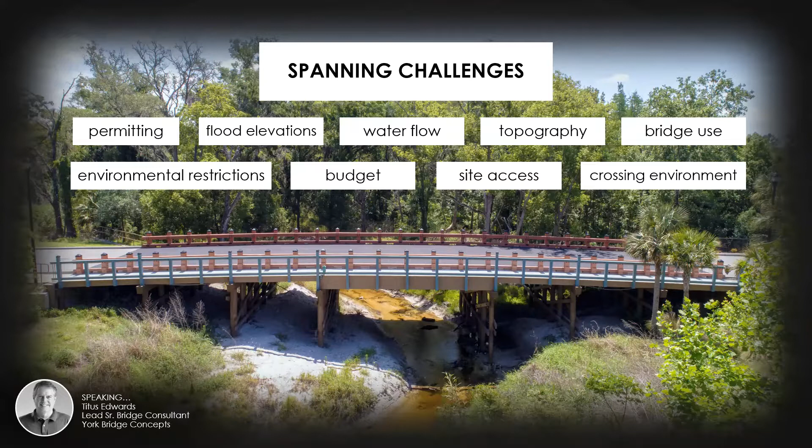Titus, I'll go ahead and pass the mic to you. Well, it's interesting, Cheyenne, that if you talk to developers, they will tell you that all the good land has already been built on. So whenever they're looking to develop, they're normally looking at land that has challenges. Now, when you're talking crossings and bridges, you're talking challenges, and there can be a multiplicity of them. There may be environmental restrictions, flood elevations, the flow of the water, the depth of the water. There may be a wetland involved, a floodway, a floodplain, stream boundaries, elevation changes, utility easements, and on they can go. And Cheyenne, even the budget of a client may sometimes be a challenge.

Absolutely, I would think budget restrictions would happen more often than not? You'd be surprised at how many times it becomes a challenge as well. But fear not, there are solutions, and that's what we're going to be talking about today.

York Bridge is a national design build timber bridge building company. In our 38 years, we've built over 8,000 bridges all over the country. Now, what that means is we have come across, with all of that experience, almost any imaginable type of crossing, and we're able to come up with a solution for the crossing.

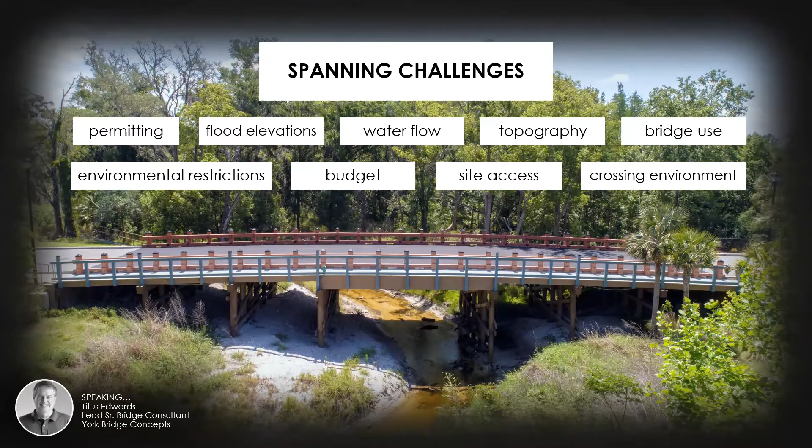In so doing, we've come up with about 5 basic spanning designs that we utilize, and that's going to be what we want to talk about in our outline today. We want to approach it from the standpoint of what the challenge was. We'll show you various pictures, how we overcame it, and why we use that type of design. Well, I'm super excited to dive in. Let's go ahead and get started.

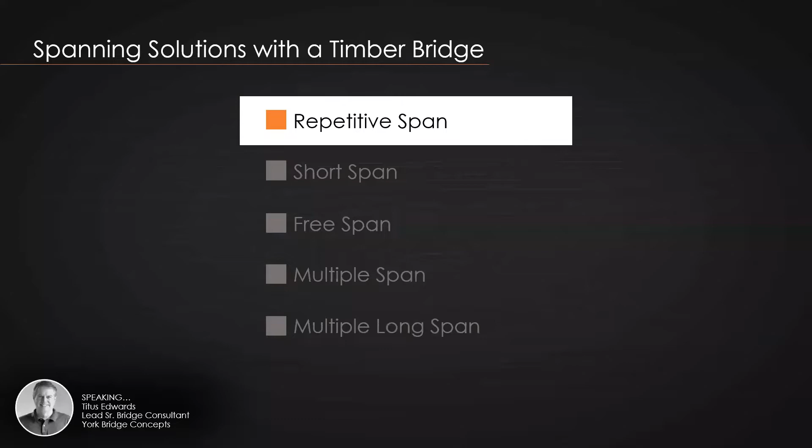The very first of the 5 spanning solutions we want to talk about is what we call a repetitive span design. What we mean by that, Cheyenne, is we're just simply taking short spans and repeating them through a crossing. Now, Titus, can I ask, what's the difference between a 10-foot and a 15-foot span? Why the difference?

It has to do, Cheyenne, with the efficiency of the size of the materials. I'm going to come back to that in just one second. There's another reason too, we'll come back to in just a moment as well.

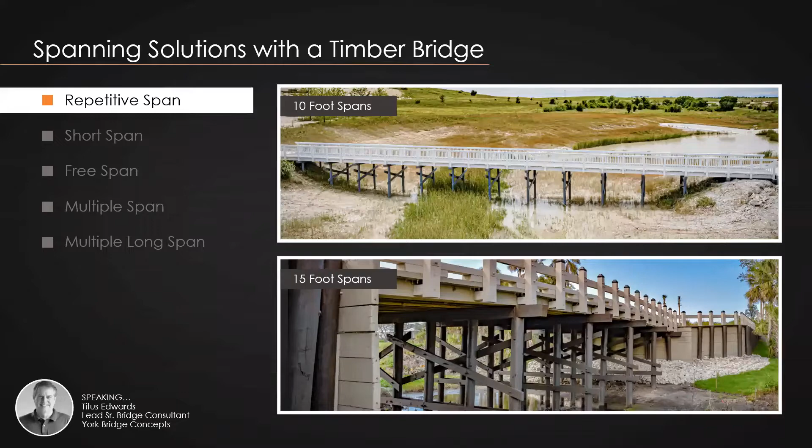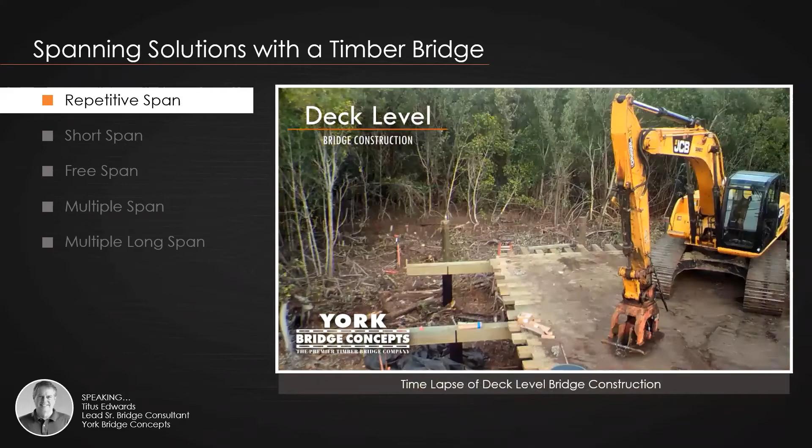But Cheyenne, there's another reason. What's that, Titus? It has to do with the reach of our equipment. We have a time-lapse video coming up showing us building a vehicular bridge down in Southwest Florida. This is a Sunset Beach bridge. Notice how we're building it. We're using an excavator, and on the end of it is a compactor hammer. We reach out, drive our piling, and we can reach out about 15 to 16 feet, drive our piling, and then build a section and drive the equipment on it. Deck level construction - we're known for that.

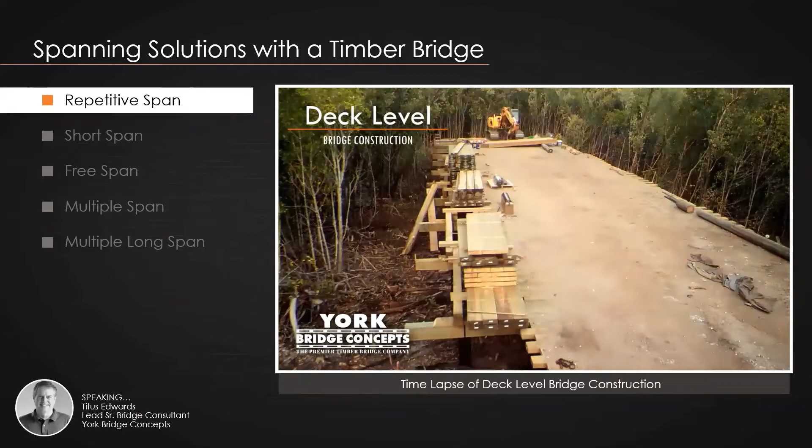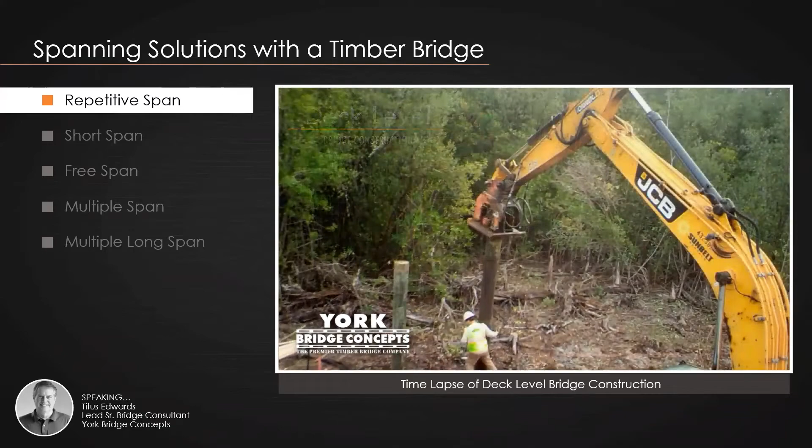We can build a pedestrian bridge that way with a smaller excavator - we can reach out 10 feet. With a vehicular bridge, we can reach out about 15 feet. That's the sweet spot, because it allows us this deck level construction, and now you can access over water without any dewatering or using mats or barges. It's a very efficient way to build, and the size of the material we're using works very well as well.

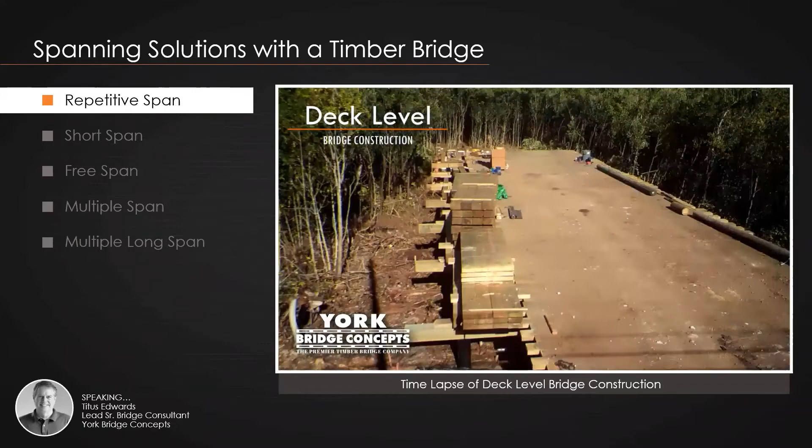Very cool. You know, one thing I love about time lapses is it almost seems like this job was done within minutes, and I'm sure the builders would definitely tell you otherwise. It took them a little bit longer than 3 minutes to build it, but we do build very, very quickly as well.

And we have some other examples of these repetitive span designs. This is the Delight Quarry Bridge in Reisterstown, in the Baltimore, Maryland area. What's going on here is a Beazer Homes residential subdivision. They were developing part of it to the left; there was another section of land to the right, but they had to get over a stream and a wetland. The way the civil engineer laid the roads out, they needed to come across, and we built this repetitive span design bridge to accomplish that. Absolutely beautiful bridge for sure, with a nice horizontal radius - it worked out very, very well.

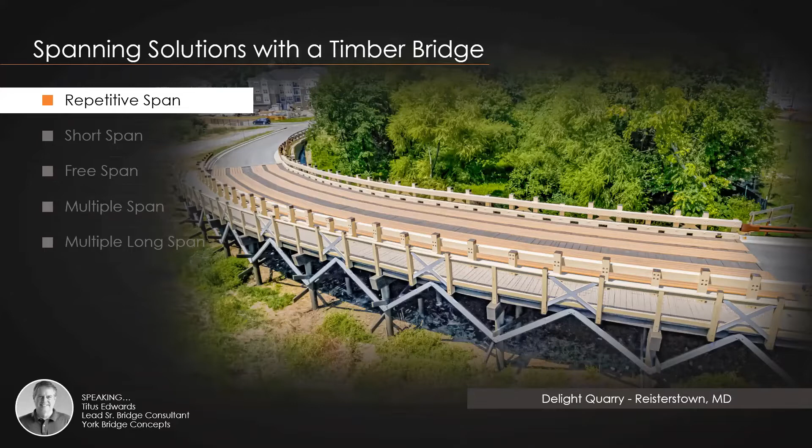Another project we did is down in Southwest Florida - this is the Ave Maria University. Isn't that a beautiful bridge? Oh yes, it is. Can you tell us about the challenge with this one? You can see it's a repetitive span design, and it's crossing over a lake. You had a university here existing, but on the other side of the lake they had property, and they wanted to build a shrine and have it be a gathering place for the students without them having to go all the way around the road. So we built, from the deck of the bridge, this pedestrian repetitive span bridge over the lake with piling bents 10-foot on center. It now allowed them that access so the students could gather over there.

I definitely love this one. I'm gonna take a leap and say the challenge here for this apartment complex would be making sure all the tenants were not swimming with the alligators to go swimming to the pool.

This is down in Florida, not far from our office, at the Iris at Northpointe. It is an apartment complex.

You can see, as all developments here in Florida have retention ponds, and the pool on the right. They wanted people to be able to walk over and get to the pool easily, so we built a repetitive span pedestrian bridge.

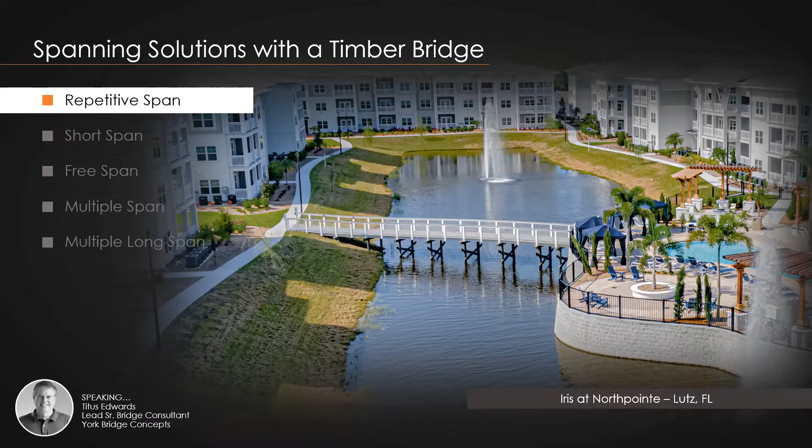Yes, you definitely don't want to be swimming across, getting involved with the alligators. Most all of our waterways have alligators in them. That's definitely one thing in Florida, you try to stay away from any body of water.

So these repetitive span designs are the most efficient, most cost-effective way to design and build a bridge over a lake, a pond, a wetland, or a waterway. But the key is where they will allow piling supports in the crossing, and that allows us to build from the deck and access places that may be difficult otherwise.

Well, thank you so much for talking to us about repetitive span. Can you go into detail about short span? Obviously, being shorter, what would be the benefit of going with the short span design?

Short span design is the second type of span we want to talk about, and that's where you have a small crossing, but you don't want to put a bunch of piling through the crossing. So you're doing one short free span design bridge. Sometimes it's either not logical or not permitted to put supports in a crossing.

The top is a pedestrian bridge, the bottom is a vehicular bridge. This is a 26-foot span you see here in the Orlando area, and you can see what we're crossing here.

By the way, Cheyenne, have you ever been to a pool complex and floated down the lazy river? Yes, I have. And the one thing I like is you don't have to pay attention to anything. I could just imagine you with your wide brim cap on, looking very nice.

This is a 26-foot free span, a very short span, and it worked very, very well. Obviously, you're not going to put any supports in the middle of that lazy river.

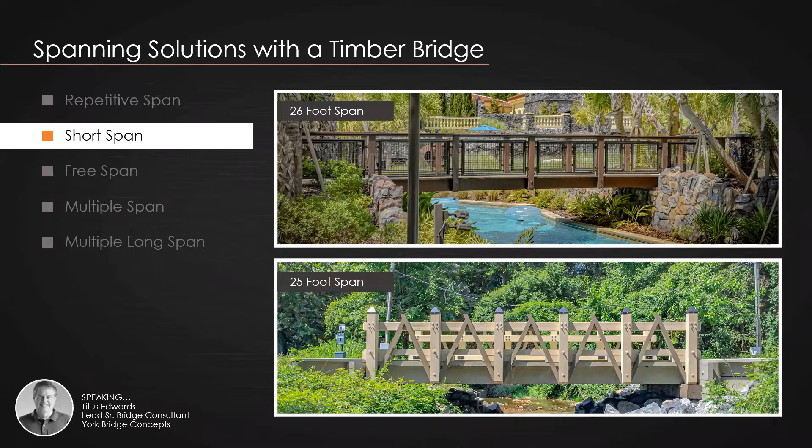It does. And this is also a very cost-effective design to build because we're able to utilize up to 26 feet, normally in the 25 to 26 foot range, sawn dimensional lumber for the stringers, and that's very cost effective.

Here's an example of these stringers that we're talking about to make the span. I believe this is the same one, the park school we just saw a picture of. Very cost efficient with these free spans up to 26 feet.

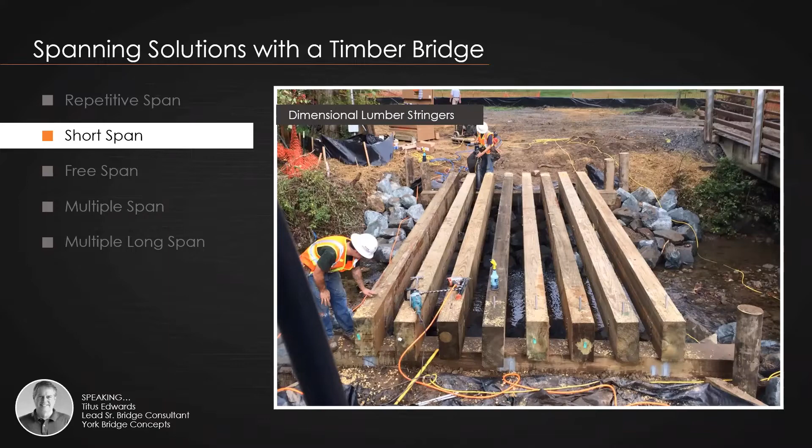Now, once we go over that, we'll talk about what we have to do in just a minute. Another bridge we built like that is up in North Carolina. This is our Meadowlands Bridge in Calabash, North Carolina.

Beautiful. Can you tell us about the challenge with this one in Meadowlands? This is a residential subdivision. You can see there at the bottom, very brief, very slightly, there's a creek there.

The developer had built out. He had one last section of land, but it was on the other side of a creek. He had to get over the creek, build a road to get access and let people live over there. He didn't really want to use a culvert; he wanted something a little bit more aesthetic.

So we designed and built this 26-foot long, one single short span, timber, two-lane vehicular bridge. It worked well for the crossing, and also worked well for the budget and the aesthetic intent the developer was looking for. So just another happy client.

We love happy clients indeed. Yes, we do. And our last example along this line is Dove Landing, a Beazer Homes residential subdivision up in Millville, Delaware.

Beautiful. So the challenge for this, I'm guessing we didn't want to go with a culvert alternative. So the short span was the one that was best for this circumstance, correct?

Correct. And they actually looked at a culvert initially. They wanted something, again, more aesthetic, that fit the crossing a little better.

What would be the benefit of free span bridges? The short spans we talked about go up to 26 feet because of the sawn dimensional lumber stringers. But what happens if you have a longer crossing that needs a single span? Well, we do what we simply call a free span using glue laminated beams. The difference is number one, the length, and number two, the beam. Instead of sawn dimensional lumber, we're switching to a glue laminated beam. These beams allow us to span further, 40, 50, 60, 70, even up to 100 feet, one single span without any supports in the crossing. They work very well for a number of reasons, and we'll talk about those in just a minute.

This bridge, by the way, Cheyenne, is up in New Hampshire. Wow, beautiful. I love it, looks like it was almost taken in late summer, early fall. You see those leaves changing. Beautiful.

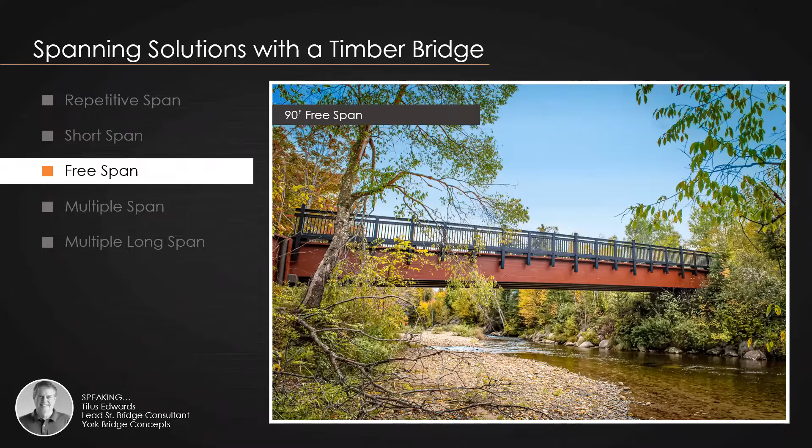Yes, Bretton Woods, New Hampshire. This is behind the Mount Washington Resort Hotel. It's a 90-foot free span, 10-ton bridge. There's a beautiful sensitive stream, and they weren't going to allow any supports in that stream. So we were able to do one single free span, and it made the crossing work very well.

Now, can you talk to us about the glue laminated beams, how it's different than sawn dimensional lumber? How are we able to get that sort of camber on that bridge right there? How are we able to do that effectively with the glue laminated beams?

You know, it's a good point that you make, Cheyenne. Sawn dimensional lumber, since it's cut out of a tree, is straight. So you cannot have a horizontal or vertical radius, you can't have a curve or an arch. But glue lams are man-made beams, and most all of them have a camber to them. You can see an extreme example to the right, but even the one on the left, by camber we're talking about a slight arch to them, which is part of the structure of the glue laminated beam, but also gives a nice side profile to the bridge.

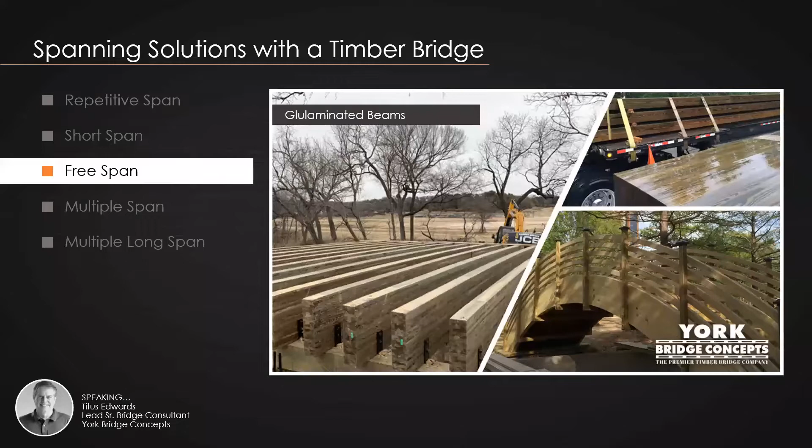Well, it's definitely really interesting, the difference of those. And I believe we have a time lapse of the glue laminated stringers getting set.

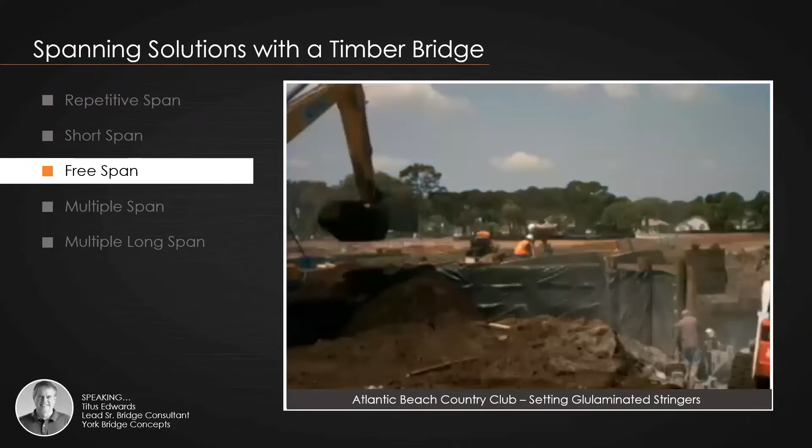Here we go. We built our timber abutments, and on top of those abutments we added the glue laminated stringers, and here you see us setting those. Now you're going to see in just a moment the completed bridge, same one. Ta-da! There it is.

It's the Atlantic Beach Country Club in the Jacksonville, Florida area. This is a 55-foot long free span bridge, and you can see on the side we use the glue laminated beams on our timber abutments, a 2-lane vehicular bridge for this golf course residential community.

Now it's interesting what was going on here, Cheyenne. This waterway may look very innocuous, but it was considered a wetland and a stream, and they were not allowed, because of the sensitive nature of it, to touch it. So they had to span over it, but they needed access to build a new clubhouse. This bridge allowed them to tie the road in and connect the new residences to the clubhouse.

Well, I think I've said all the past ones have been my favorite. I think this is my new favorite, just because it's beautiful. I love how it captures the color of that clubhouse in the background. Yes, indeed, it worked out very nice.

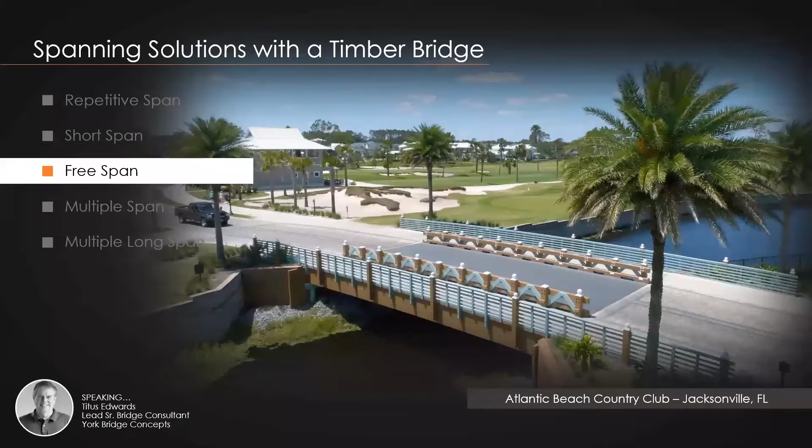Well, where might we use some of these free span designs? We'll show you some real quick. The one on the top left, you're crossing a very sensitive stream. This is Keystone College up in Pennsylvania, an existing school on the other side of the river. They had land and wanted to build ball fields, and this vehicular bridge allowed them that access.

The one on the right is Mount Washington Resort Hotel again in New Hampshire. This is the entrance bridge, an 80-foot free span, very sensitive stream with a lot of velocity. Because of the velocity, you wouldn't want to put a lot of supports in the water.

The one at the bottom is kind of hard to see what's going on, with what looks like a massive thing of trees down there. This is in California, which has a lot of environmental restrictions. This is actually a very deep gorge or ravine that was all environmentally protected, so they were not allowed to put culverts in or supports down in there. So we did one single free span, 77 feet long.

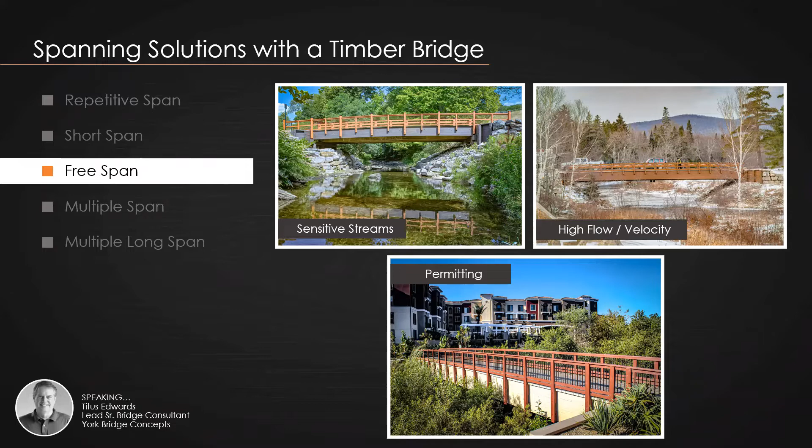And this is an apartment complex. Again, you're connecting different sections of the apartment complex to allow people to walk back and forth.

Now, can you tell us about the challenge with this bridge in Waynesboro, Virginia? This was a trail project, and they were building this trail right alongside the river, a beautiful place to walk and bike. But they had a little creek inlet that came across, dumping into the river, and the trail crossed it. So to continue the trail, they needed a bridge. In this case, they didn't want to put any supports in the crossing, so we did one single 40-foot long free span with glue laminated beams.

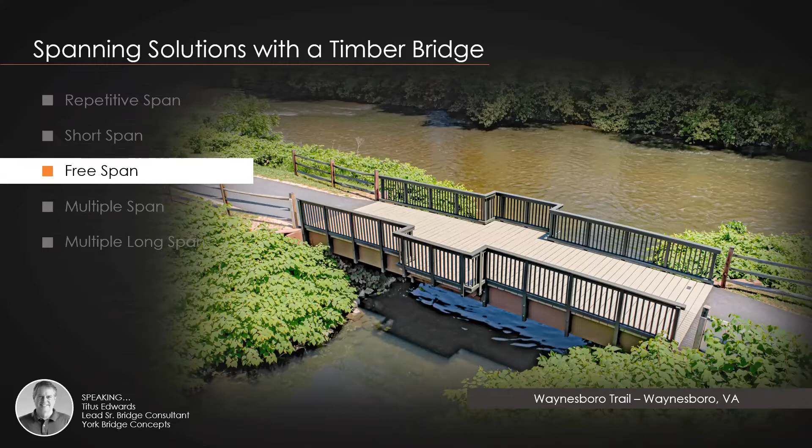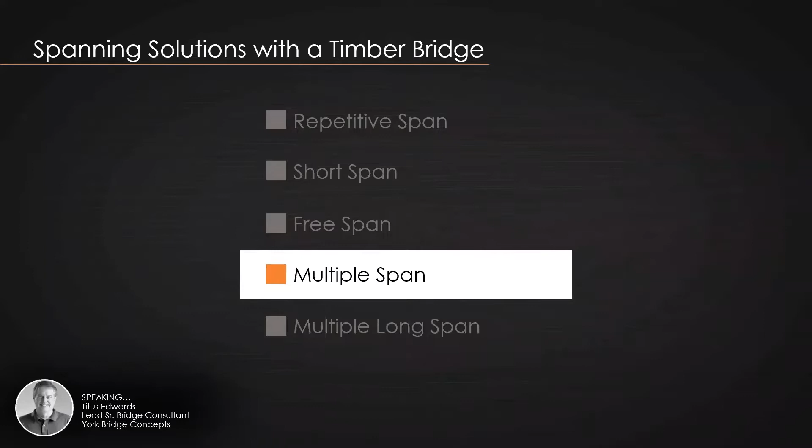Which leads us to our multiple span. Can you dive into a little bit about the multiple span versus free span, and the short and repetitive? Now we're really getting creative, Cheyenne. You're going to see this with the next two, which are variations of one another. By a multiple span bridge, all we simply mean is a hybrid of the first three designs, where you have repetitive span approaches and a free span section.

Now, here's a couple of drawings. The top's pedestrian, the bottom's vehicular. You're going to see both of these bridges actually completed in just a minute. But look what you have going on at the top. There in the middle, there is a 44-foot long free span with a glulam beam. But then notice, look left, look right. You see the piles, the short repetitive span approaches. That's what we mean: a single bridge, but it's made up of spans of different lengths.

The one at the bottom, same thing. Now it looks like on the bottom, there was an existing creek along with an existing utility easement. Was that one of the challenges we had to figure out how to implement this bridge? Exactly. We're going to see more about this in just a moment, but there was a stream in the middle, and there's also a utility easement, meaning a utility pipe was buried in the ground. So the bridge is 250 feet long, and we put an 80-foot free span in the middle over the creek and easement, and then added our short repetitive span approaches.

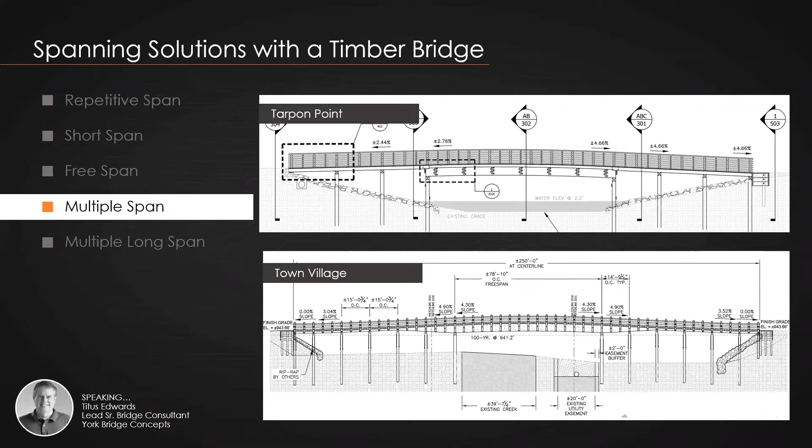This is very creative, but it's a very effective and cost-efficient way for these longer type of crossings. I believe we have an example of the town. There it is, Town Village. That's what we were talking about.

This is actually in Kennesaw, Georgia, north of Atlanta, at the town center at Cobb. It's a mall. By the way, Cheyenne, have you ever been to a mall? You know, I feel like if I were to say no, my wallet would stare at me and laugh. So yes. All women love malls, right?

Well, there is a big mall right there to the left, but to the right, the developer had some land and he wanted to connect so he could build some apartments and other commercial and residential areas. But he had a problem: there's a stream there. And right next to the stream we saw in the drawing, there's a sewer line and the sewer easement.

And this is all considered a floodplain, but we resolved his problem by a multiple span design. You see the short span approaches, the 80-foot glue lam span over the sewer, over the creek, and then the pile supported on the other side. So multiple span design worked very, very well and very cost efficient for the client.

You can definitely see the creative aspect that went into that design for sure. The one on the bottom, I love these covered bridges, Cheyenne. Yes, beautiful. This is Winyah Bay, another residential subdivision in Georgetown, South Carolina.

This is the entrance road going in to allow people to get there, build houses to the subdivision, but they had a problem. And that was what looks to be a little pond is actually considered a wetland area. And they were limited in how much impact the Army Corps of Engineers would allow into that wetland.

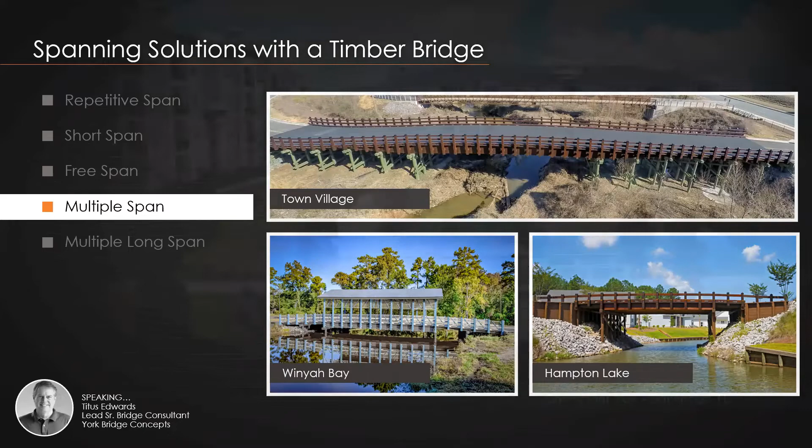And Esplanade Lake Club, love this, one of my favorite bridges. Residential subdivision off to the left. This is the entrance road coming in. So they had to get over this canal and connect the lakes, allow boat traffic. So we spanned over that section and added two small approach spans. And again, it met the design intent that they were looking for and kept it well within their budget. And again, what a beautiful looking bridge.

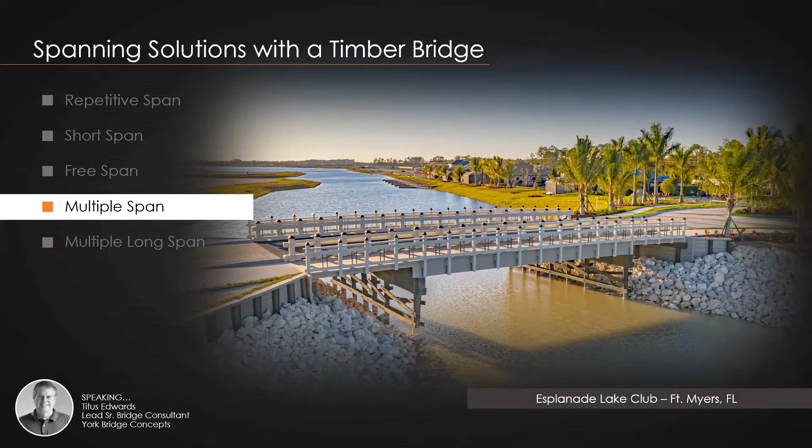Absolutely beautiful. Yes. And one final one. This is the drawing we saw to begin with, the Tarpon Point. There to the left is the Westin Hotel, and they built a convention center. To the right is a new parking lot. So they wanted to get people from the parking lot to the convention center. A bridge was needed across this waterway.

Now, you can't really see what's going on here, Cheyenne, but this was a very sensitive environmental area. Plus the soils were really, really bad. They're like butter. You drive piling more than 100 feet to be able to find any bottom. So we wanted to limit the number of piling bents. So we did a multiple span design. You've got the 44-foot free span over the main water channel with the short free span or repetitive span approaches left and right. Turned out very nice.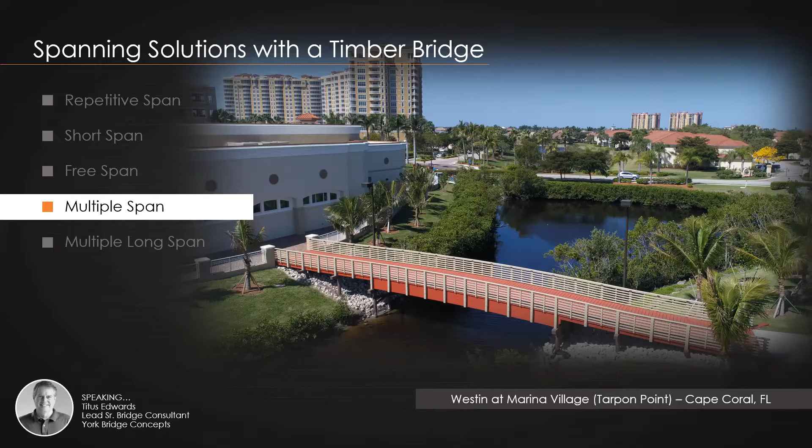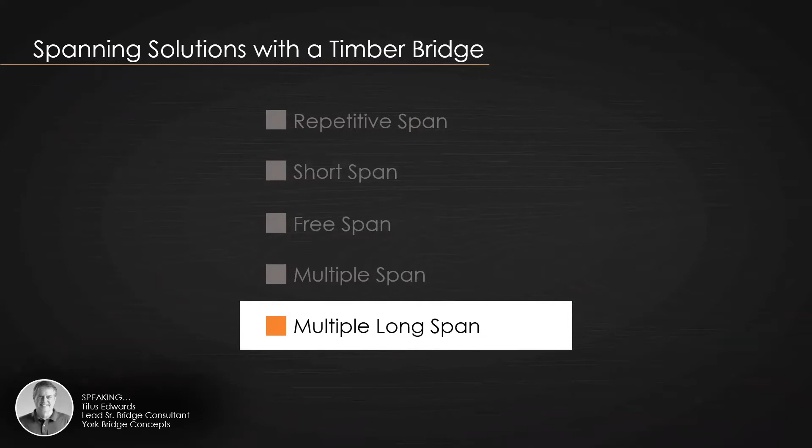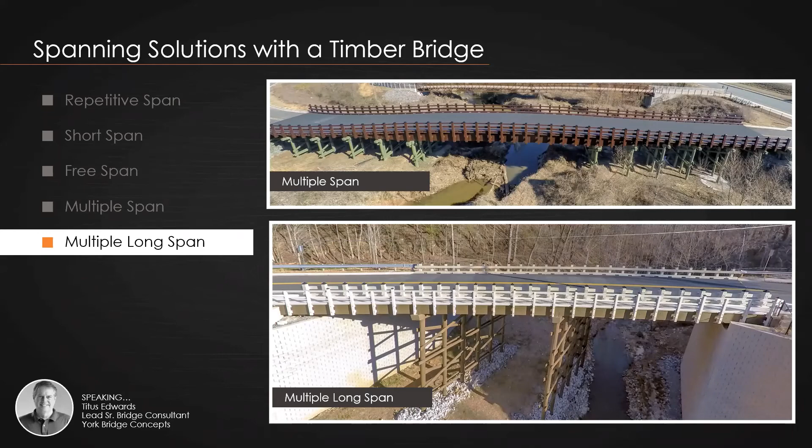Multiple long span design—again, very creative and used in a number of cases. We're going to show you this one on the bottom and talk about it because it's a perfect example of where and why we might use something like that. It looks like there's a sort of tilt or arch to the support. Is that correct?

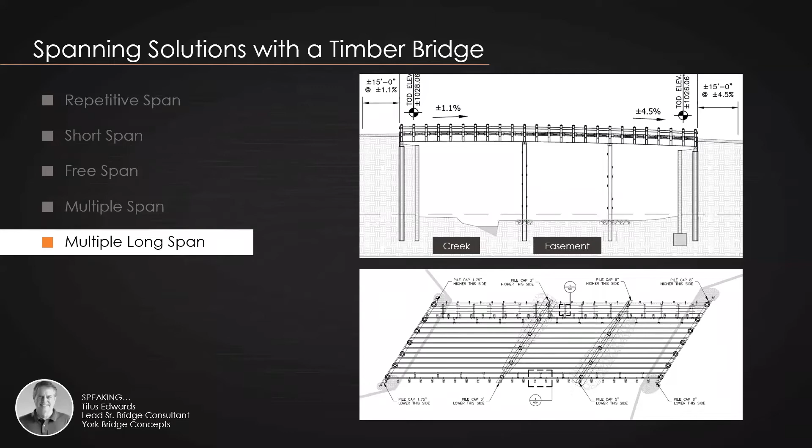That's correct. At the bottom, you can see the piling bents—the bridge is skewed or angled to the road. We'll show you why in a moment. Up top, you see there's a creek we're crossing, and to the right a sewer line with a sewer easement, meaning a utility is in the ground. But also look at the height—this bridge is almost 40 feet high. So you had height, a creek, and a utility easement—a lot going on, all the things, all at once.

A developer wanted to build an assisted living facility—this is called Inspired Living in Alpharetta, Georgia. The road coming in is the entrance road. They needed a 2-lane road to get people up there, and they had to cross this stream, which is a floodplain. The engineers originally designed multiple culverts, but when they did the HEC-RAS study, they found it would raise the flood elevation 13 feet, which they would never have been allowed to do.

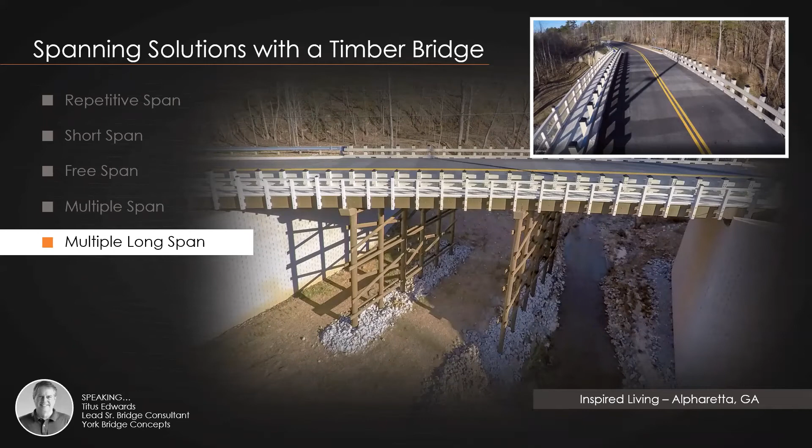We came in with this 3-span, multiple long span design bridge with the skewed bents. It worked perfectly—it's actually less expensive than the culverts. It met the client's budget, and look what they ended up with: a beautiful bridge that solved all of their issues. Another happy client.

Ta-da! So here you're seeing some of the issues: height, soil conditions, limitation to supports. All of these factors go into us coming up with our design recommendations, and sometimes these multiple long span bridges work very well.

Thank you for sharing that. For this example, the challenge looks like almost a recreational complex in a neighborhood—you see all those trails. Was this also an environmentally sensitive area that we had to be careful about when placing this bridge? Well, there was a lot going on here.

This is the River Lights Master Plan Community in Wilmington, North Carolina, a Newland community at the time, right along the Cape Fear River. This whole community was built around people getting out to exercise, walk, and bike, and we built hundreds and hundreds of feet of boardwalk, docks, and piers. This pedestrian bridge was kind of unique—you can see the sidewalk connecting over this body of water. But guess what? They wanted to go under the bridge.

Very cool—yeah, we definitely didn't want them going underwater, just under the bridge, for kayaks and boats, mainly kayaks. They wanted to be able to go through and under the bridge, so we designed it with multiple long spans. It's 120 feet, made up of three 40-foot glue laminated beams for the stringers, and it worked very well. Again, what a beautiful design.

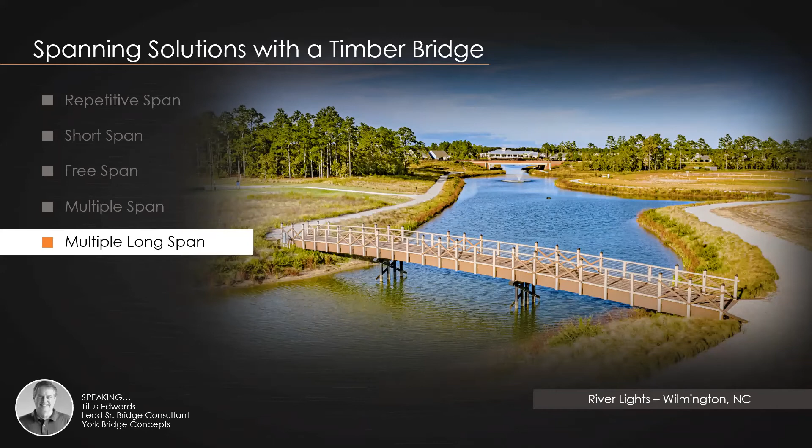Well, Cheyenne, we've seen a lot of beautiful bridge pictures today, and we've seen all different kinds of challenges and how we were able to overcome them by utilizing one of our 5 main spanning solutions. We're able to solve almost any crossing challenge with one of our timber bridges, to come up with a creative design solution that will work for your budget, and then you're going to end up with a beautiful legacy design York timber bridge.